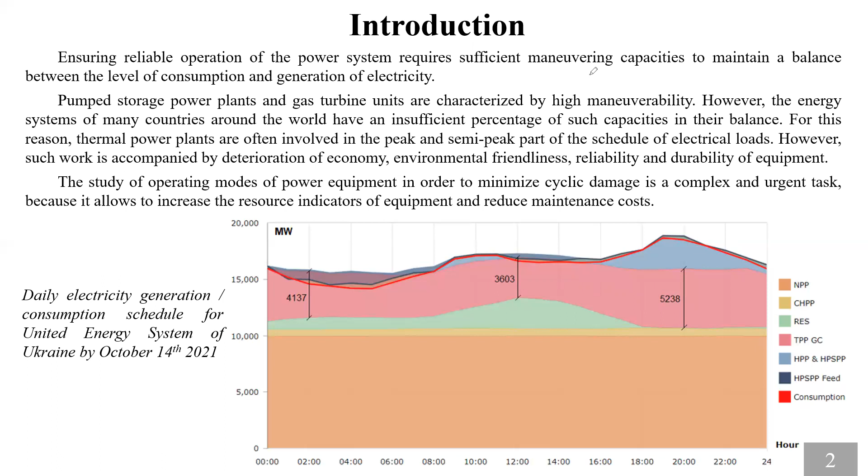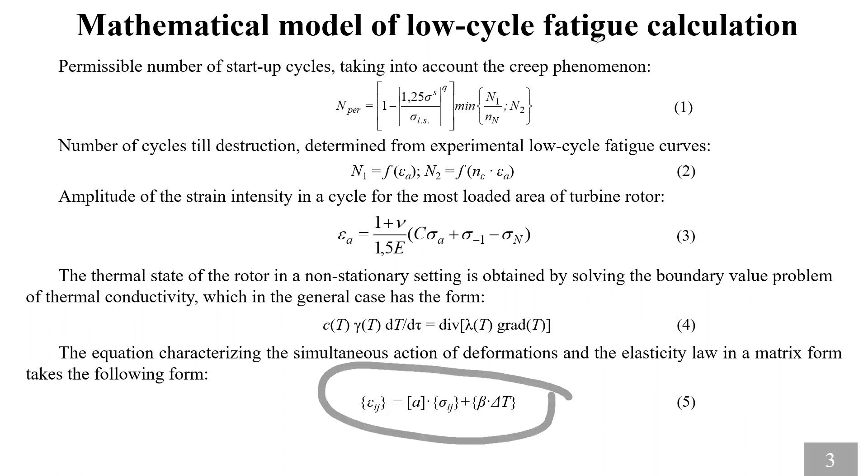By the way, the object of our research is an intermediate pressure rotor of K200 steam turbine. This rotor is made from 25Cr1Mo1V steel. The first 7 stages of our rotor are forged together with the shaft. The other 4 stages are mounted on the rotor in a heat-shrinkable landing. The calculation model of our rotor is set in 3-dimensional formulation, and this model is sampled by approximately 10 million finite elements. The computational mesh is compacted in the radial direction, especially in the zones that are stress concentrators.

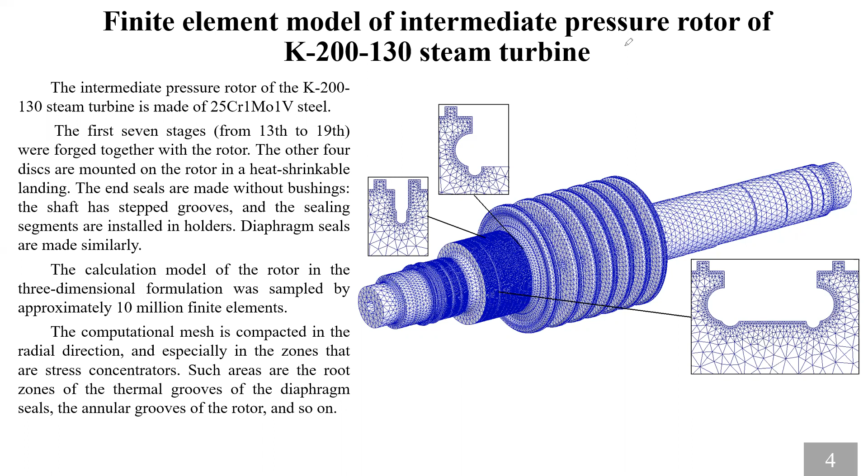For example, the first stage is preheating of steam pipelines and the flowing part of the turbine. Then we are going to push our rotors to idle frequency, then synchronize the turbine generator with the power grid, load our turbine generator to its nominal capacity, and after reaching 200 megawatts, we are going to stabilize the temperature field of all our turbine unit.

As you can see, both schedules are quite different. For example, the first preheating step lasts 33 minutes for the first unit and 73 minutes for the second one. This allows more uniform heating of the flowing part of the second unit and to perform subsequent stages of startup with the usage of steam with higher temperature and higher enthalpy. Pushing and accelerating the turbine unit on the second stage to idle frequency is faster with less steam consumption compared to the first schedule.

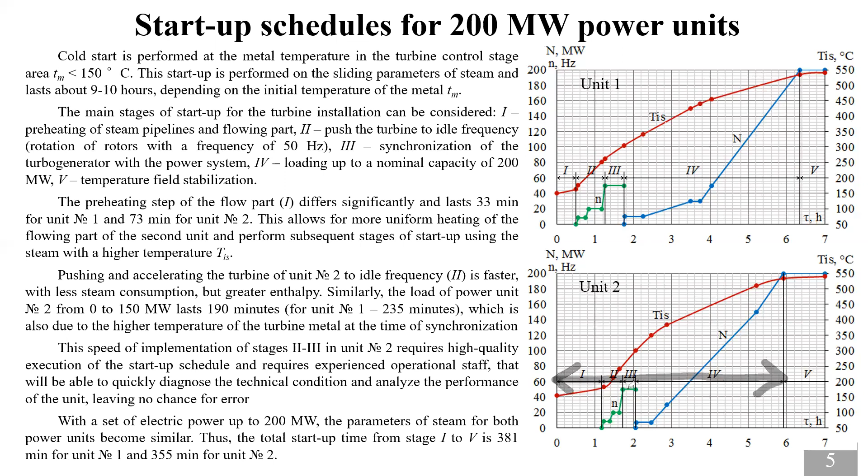On the next step of calculation, in accordance with the presented startup schedules, we find boundary conditions of heat exchange and calculate the thermal state of our rotor. At the operation with electric capacity of 200 megawatts, the highest temperatures are observed in the area of the first control stage of the turbine, and the temperature level lowers along the way of flow of our steam.

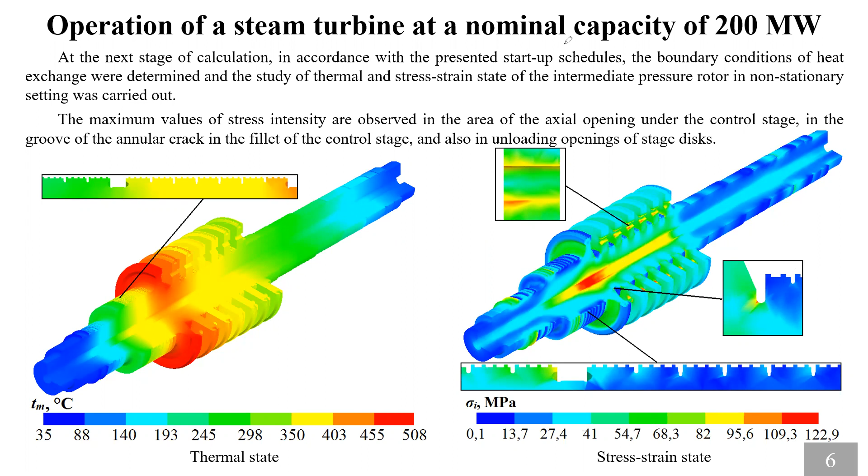As you can see, the highest unevennesses are present during the startup period when we are pushing our rotor to its idle frequency. And these temperature unevennesses are shown for both schedules of startup. The maximum values of temperature gradients are nearly 4,000 Kelvin degrees per meter, as you can see for both schedules.

And these high temperature gradients are observed in areas 5 and 6, which correspond to the first control stage of the turbine rotor. For the rest of the studied areas, there is a significantly lower level of temperature gradients, as well as less significant fluctuations of these values, which you can see on further periods of time.

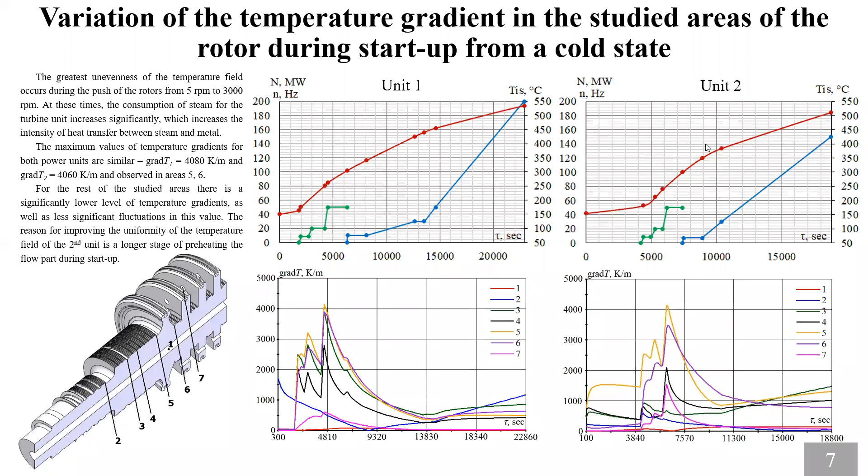And same thing with the compressive forces. As you can see, for the areas 3, 4, 5, and 6, the highest stresses are compressive. And compressive stresses above 400 megapascals are observed for a much longer period of time for the first unit compared to the second one.

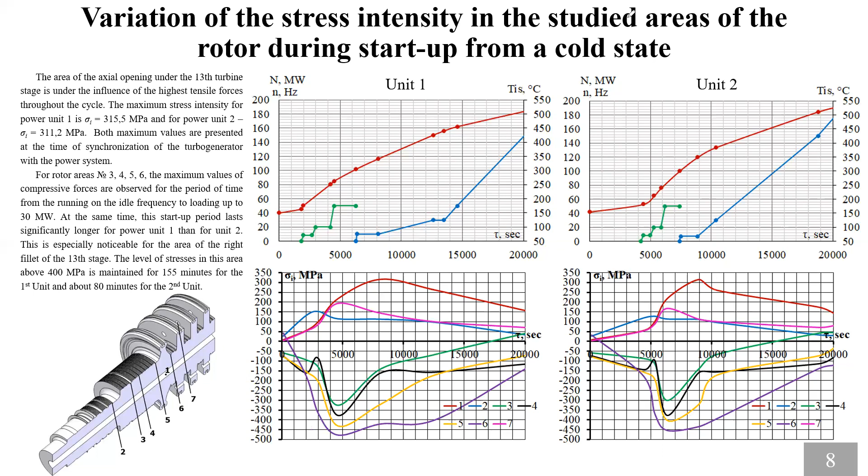As you can see, the permissible number of startup cycles for the first unit is nearly 3,300 launches, and for the second unit is nearly 3,800 launches. So due to the more uniform heating of our turbine and a more rational startup time, it was possible to increase the permissible number of cycles by nearly 16%. And since the 200 megawatt power unit is launched about 1,500–2,500 times during its life cycle, the obtained values of the allowable number of cycles are satisfactory for our equipment.

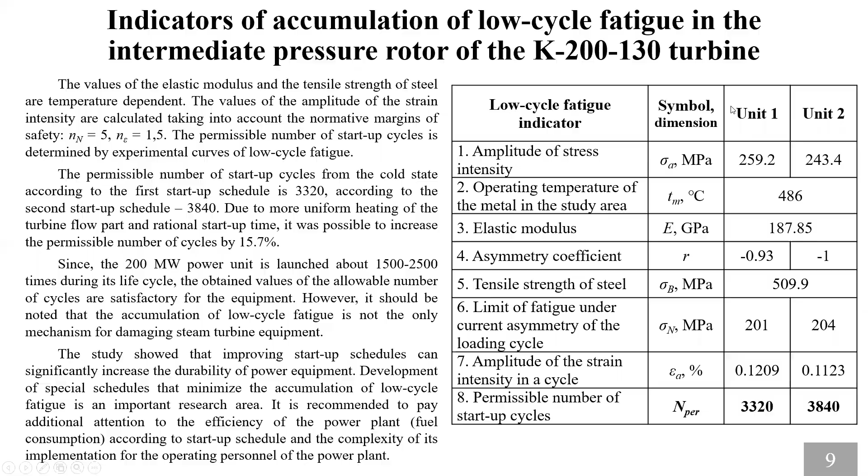So let's highlight some conclusions of our research. Startup of the turbine equipment of the power plant is a complex and responsible mode of operation. It's characterized by significant damage of the metal by the mechanism of low cycle fatigue. To assess this damaging effect of startup operating modes, we considered two different startup schedules. These schedules are used on the existing 200 megawatt power units of the energy system of Ukraine. They differ in the parameters of the steam and the duration of some startup stages.

Based on the study of the thermal and stress-strain state of the rotor during startup, it was found that the greatest non-uniformity of temperature fields occurs during push of the rotors. At the same time, high stress intensities are observed later, for the period of time from running at idle frequency to loading of 30 megawatts of electric power. The amplitude of stress intensity in the cycle is nearly 260 megapascals for the first schedule and nearly 240 megapascals for the second one.

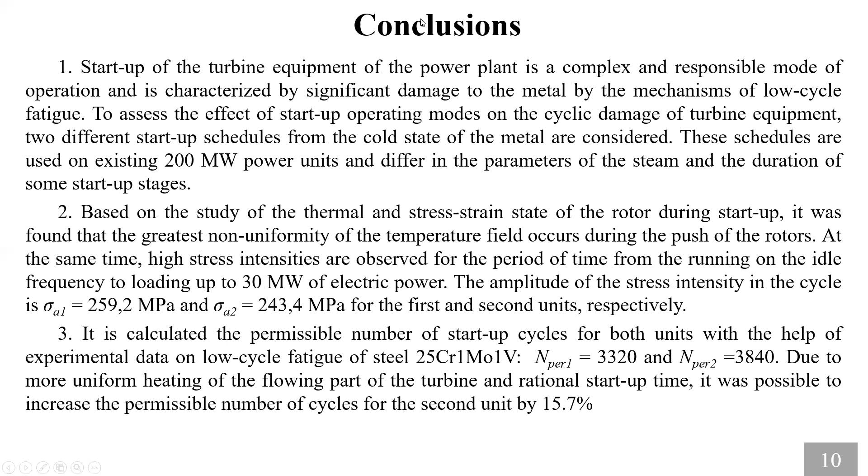It is calculated that the permissible number of startup cycles for both units, with the help of experimental data on low cycle fatigue of 25 chromium steel, is nearly 3,300 launches for the first unit and 3,800 launches for the second unit. Due to the more uniform heating of the flowing part of our turbine and more rational startup time, it was possible to increase the permissible number of cycles for the second unit by nearly 16%. That's all. Thank you for your time and thank you for your attention.